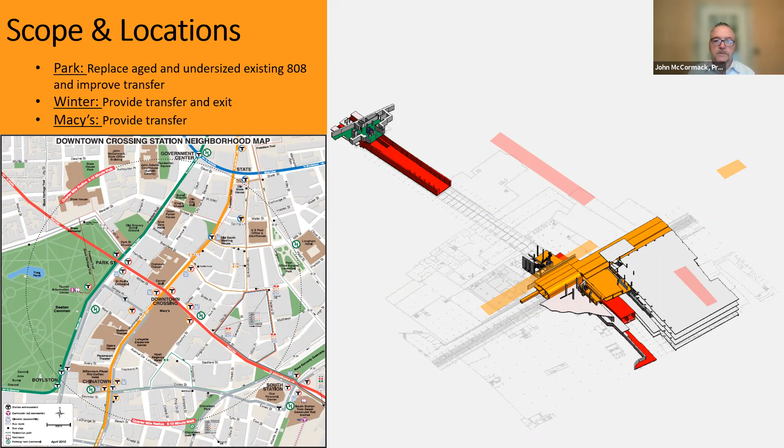Park Street, on the right hand side, is up at the northern end of the Winter Street Underground Concourse. That is a connection between Park Street Station and Downtown Crossing Station. Winter Street is the existing elevator that is there today, that currently goes from the Washington Street surface level down to the orange line unpaid lobby.

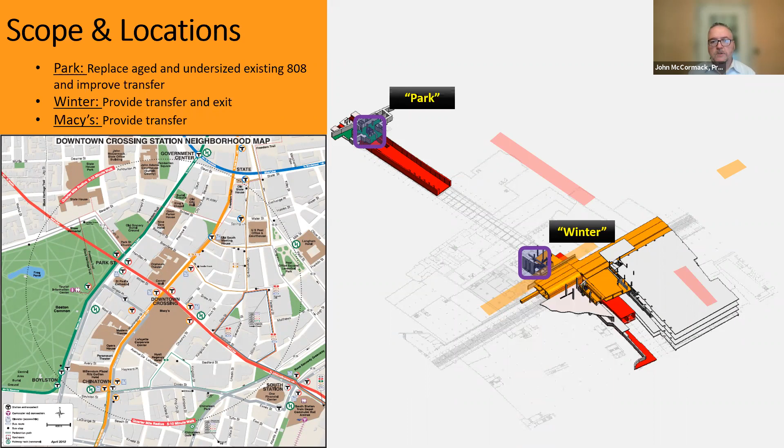And then Macy's is our brand new elevator that will be basically right next to the Macy's building, and it will travel between the paid area of the orange line, Summer Street Concourse, which connects to the orange line northbound, and the red line southbound service via the South Passageway Tunnel.

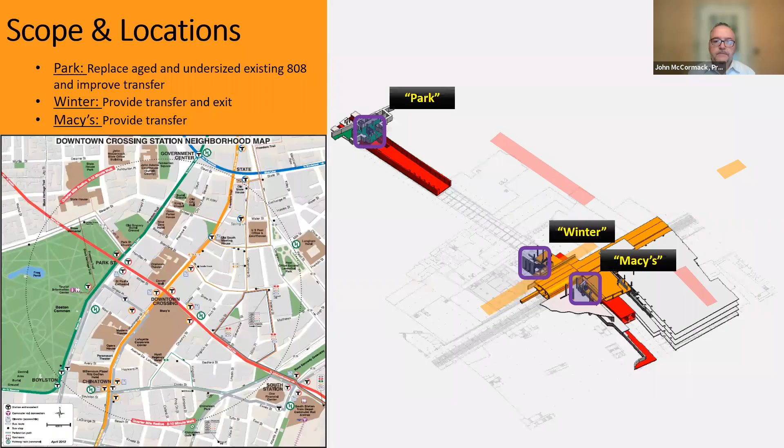The Park Street elevator, this is a general location of it. A couple of renderings. This elevator will involve a new stairway too. This elevator will replace an existing elevator, which is currently located at the center platform next to these stairs. That will provide a connection between the orange line southbound and the red line northbound via the Winter Street Concourse. You can see an existing picture inset, the top small picture.

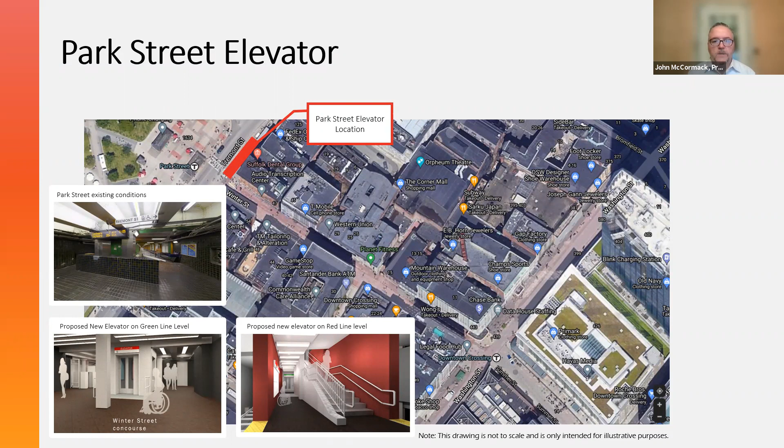That's what's there now. The renderings below show what we are proposing to install. This is a 3D animation of the Winter Street, the Park Street elevator.

We are basically starting the animation. We are looking at a section that cut through. At the top is Winter Street, just below Winter Street, and on top of the roof of Winter Street Concourse are some utilities. You can see some rods and some rectangles protruding out there. We have the Winter Street Concourse with our center columns in green, indicating that Park Street Station is in that direction.

We are looking towards Park Street Station with the orange line Forest Hills platform to our backs. Below, you will see the red line tunnel tubes that run below the Winter Street Concourse between Park Street Station and Downtown Crossing Station. Now I'll start the animation.

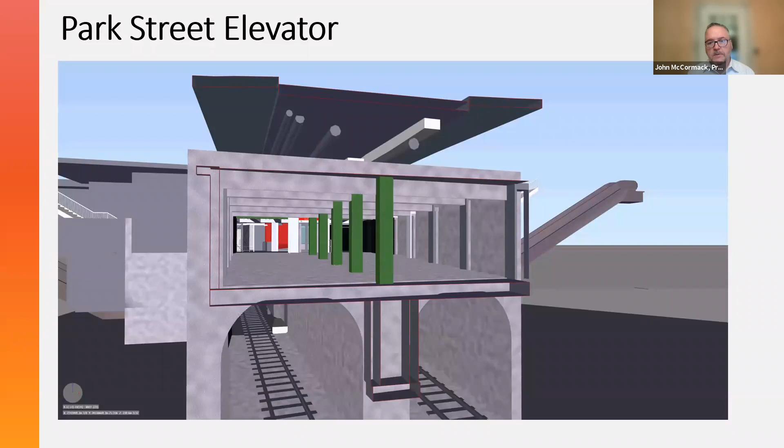It's just bringing us up the Winter Street Concourse to the location of this new elevator, which will travel between this level and the center platform of Park Street's Red Line Station.

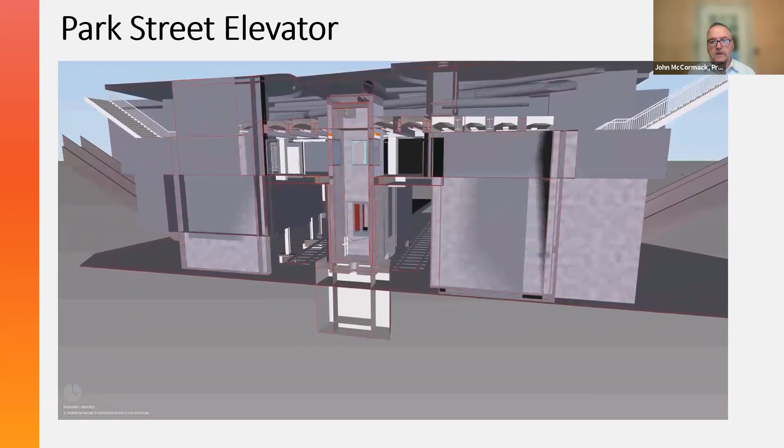We're making use of an existing well in the right of way, between the tracks, to make that part of the new shaft of this new elevator. So we will be doing a lot of work close to the trackway up by Park Street Station at the southern end. And that concludes the animation slide for Park Street elevator.

Moving on to Macy's elevator. This elevator is on the Summer Street Concourse. It's within the paid lobby area of the orange line and the red line southbound at Downtown Crossing Station.

We will be installing this elevator in between walls of an existing stairwell. It's a U-shaped stairwell, so we'll be putting it in the middle of the U. It will connect people down from the orange line down to the red line and vice versa. Once down on the red line, you will travel down the south passageway to the red line platform at Downtown Crossing Station, which provides service to points south, Ashmont and Braintree on the red line.

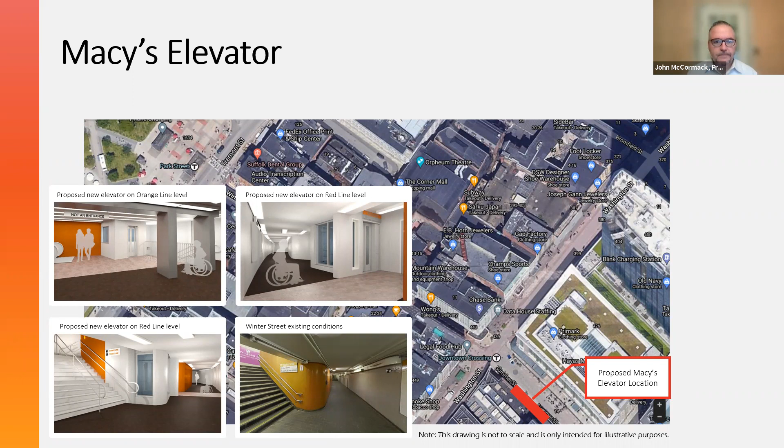The Macy's elevator, this is an animation of that. We're starting out in the south passageway level on the red line level. So this is the bottom stop for the elevator. It's a 2-stop elevator. We're putting in as much glazing as possible for public safety.

Obviously, since these elevators are all underground and right up against existing building foundations, we are tight for space, so we are doing the best we can to make it as accessible as possible. I'm going to start the animation now and just run you through the Macy's elevator.

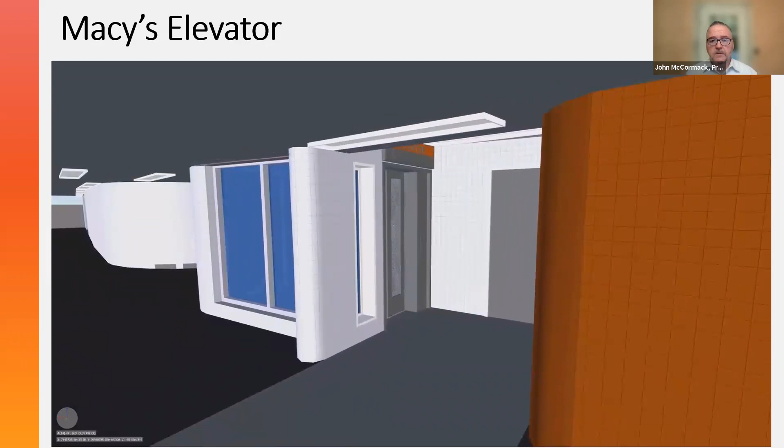In the animation, basically we're backing up the south passageway. If you can imagine, we're walking backwards to the stairwell that would lead up to the orange line southbound platform.

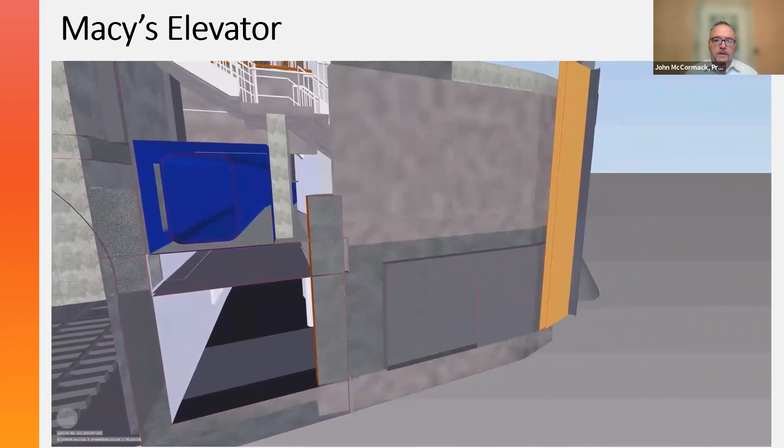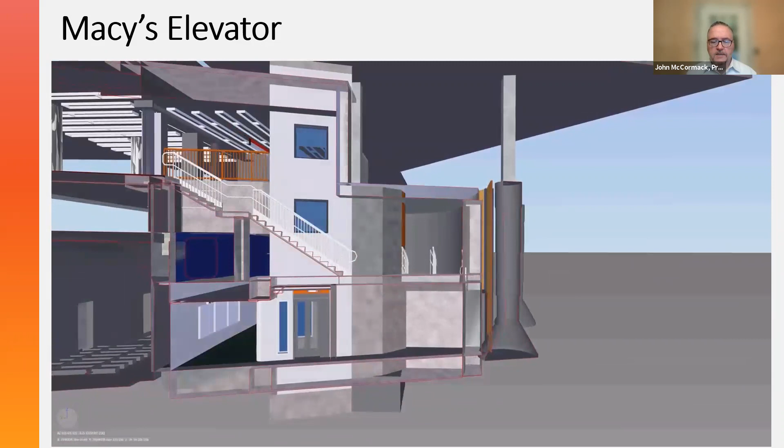This is a breakaway showing the stairs and the hoistway. There's a blue square on the left that runs under the stairs and over the ceiling of the south passageway. That is a very large and very old sewer line that is active, so we have a lot of work to keep that intact during construction. It just adds to the complexity of the project.

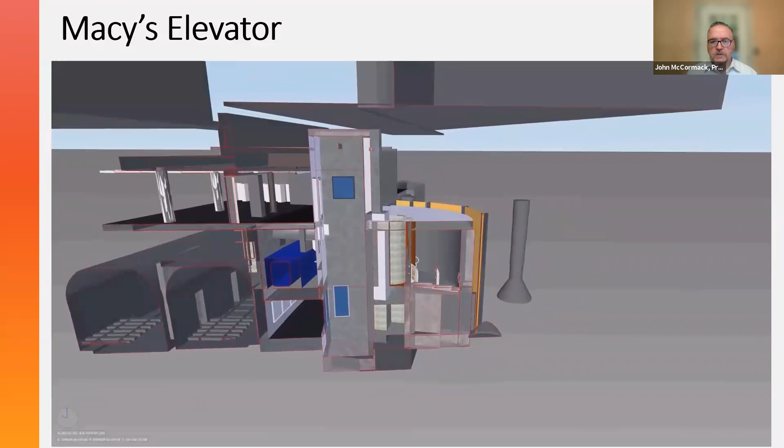This sewer will also impact the construction of the Winter Street elevator. As I said, there's a stairwell there, U-shaped, and we're going to squeeze this elevator inside the U to make that connection, as I previously indicated.

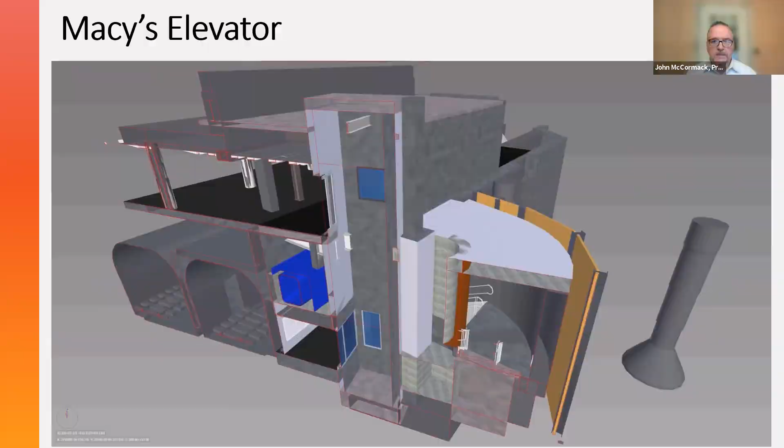What's interesting is this elevator will be electronically controlled, so if you enter at street level and want to take it down to the Red Line southbound South Passageway Tunnel, you'd take it one level down, the doors would open on one side, you'd exit, pay the fare at the Orange Line level, come around onto the Orange Line platform at Forest Hills, and re-enter the elevator. There'll be doors on the opposite side, and you can continue down to the Red Line level on that same elevator. This makes use of the existing shaft, which we'll be enlarging a bit to make it as accessible as possible and structure compliant.

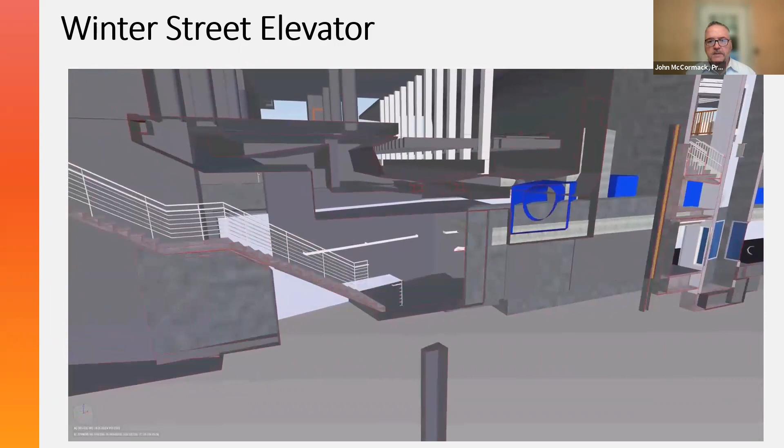Now I'll take you to the animation and walk you through this. Again, we're taking this existing elevator and replacing it with a new one that will allow customers to access the Red Line below the Orange Line. You'll also still be able to access the Orange Line.

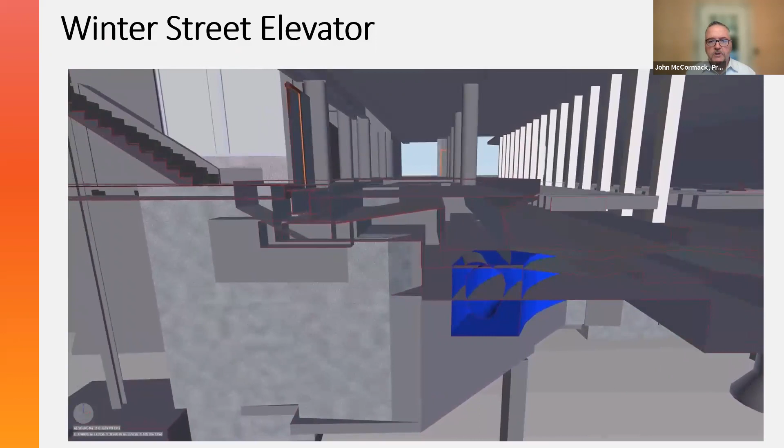Here you see the Orange Line tracks with center white platforms. Underneath those tracks is the infamous large, very old Boston Water and Sewer Commission sewer that we will have to support during our construction. Right now we're looking down the platform of Forest Hills on the Orange Line, and that's breaking away.

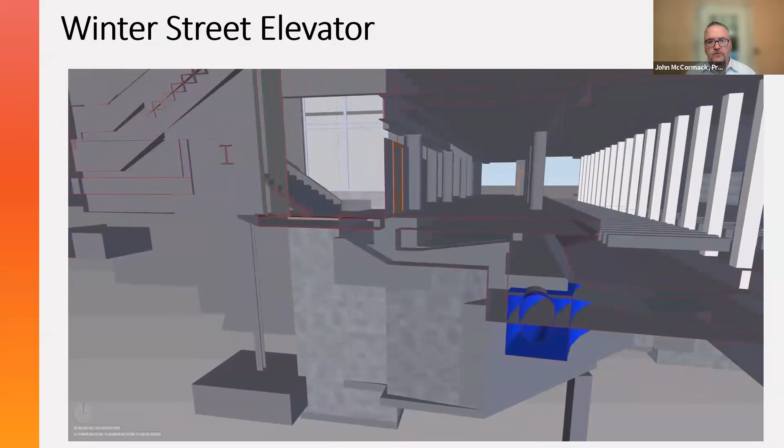I'm going to show the shaft at the Red Line level where people will enter and exit the elevator. There'll be a small ramp up to the South Passageway due to the difference in elevations, and that will lead down to the Red Line south platform at Downtown Crossing Station.

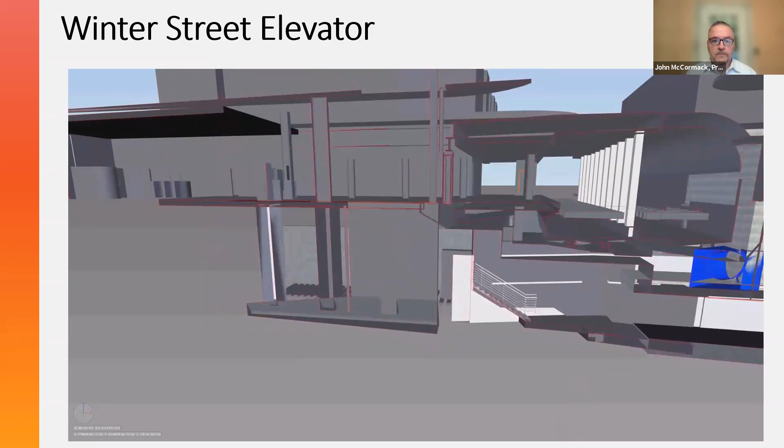The schedule for this project: we are currently progressing from 30% to 75% design. The 75% design is due this December, a couple of months away. After that, we will be shooting for 100% design in late spring, early summer of next year, 2022.

And then put it out to bid in the summer of next year, and get an NTP for the contractor to start construction in approximately September, late summer, early fall of next year. The construction will last approximately 2 to 2.5 years.

And then Park Street, which we are looking at utilities on Winter Street to see if any need to be relocated, that design is lagging a little bit behind the other two elevators. So we're looking at finishing up Park Street construction in Q2 of 2025, and then being complete in the May, June timeframe of that same year, 2025.